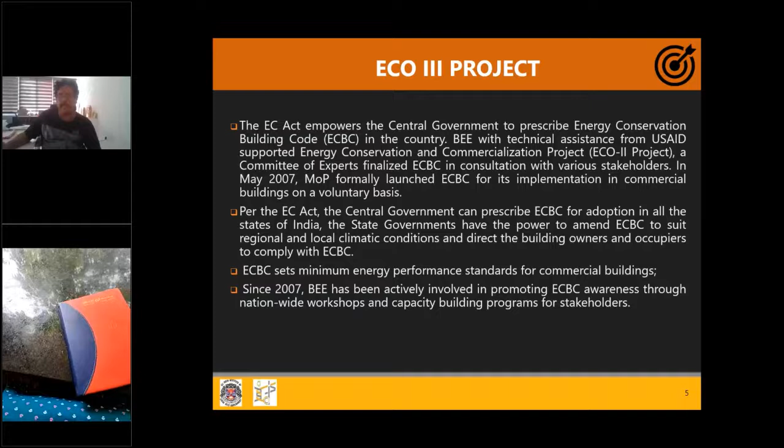Now under capacity building, they had two targets at that point. One was making people trainers - so all of us who are ECBC master trainers were part of that objective. There was a figure at that time - I think 52 standards we had at that time - and we needed to create a certain number as part of that objective. The second objective was training a certain number of people through the ECBC master trainers who were trained in the code.

So all these training sessions that are happening are part of that second objective. We go to different state ECBC cells, there's an invitation, and the audience is mostly representation from local bodies, engineers, architects, consultants, architectural firms, MEP consultancy - all these people. So the second KPI of the second objective was to conduct a certain number of such sessions. Yes, is there a question?

Hello. Sir, your voice was cutting in the middle. Is it okay now? Yes, sir, now it is fine. Hello, sir. Okay, yes, sure, wait, let me see. Where's the speaker of this thing? Anyways, so...

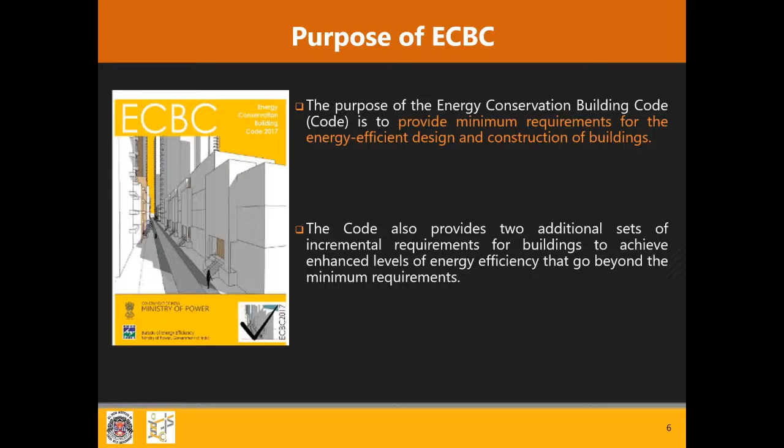Now, when ECBC started, as I said, it was targeted for the commercial sector, so any commercial building. The minimum threshold for the code to be applicable was a connected load of 100 kilowatt or greater, or a contract demand of 120 kVA, and it was intended to be used for commercial purposes only. So private residential buildings, even if their contract demand or connected load exceeded 100 kilowatt, were not part of the ECBC scope at that time.

So in the first part of India's ECBC journey, residential was not part of it. Then slowly, residential became a huge energy demand space in the whole India energy market, and hence they started the Eco Niwas Samhita process, and then it went on.

Now, as I said, through ECBC you can be either an ECBC building, ECBC Plus building, or Super ECBC building. So these are the three levels of energy efficiency that you can achieve.

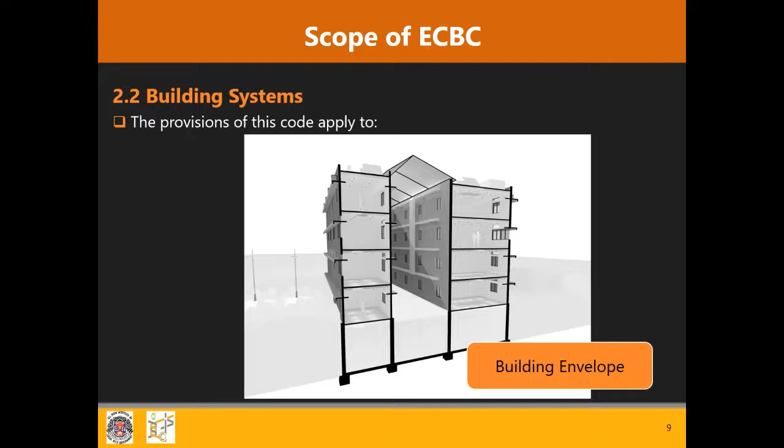The first aspect is the building envelope - that is the exterior wall, the roof, the glass. The internal floor and ceiling are not that impactful, but still have a marginal impact on the entire energy performance of the building. Skylights also form part of the building envelope. Even underground, if there is a basement, the external wall of that basement, the slab on floor - all those things form part of the building envelope.

Second is the comfort system - all HVAC related stuff, any system meant to create comfort within the building. Your HVAC or heating, if the building is located in a very cold region and you need heating, so all those systems and how you control them to give you that comfort - that is another aspect in the scope of ECBC, that ECBC controls to make your building compliant.

Then the third is lighting and its control. Lighting is a big part of energy consumption of any building. In commercial spaces it's even more important because lighting has to be on 24 hours a day, either for security reasons or other needs. Although ECBC exempts lighting that is there for emergency or security reasons.

For example, if there is any establishment, say a defense establishment, ECBC cannot say 'keep this much LPD to save energy.' At that time, national security is a priority, and anything there for emergency or security reasons cannot be compromised. Similarly, in industrial buildings, any applicable code generally does not include the process energy and the HVAC or lighting that is required. If there is a factory where a high lux level is required, you cannot compromise on that, because if you compromise, people may get injured.

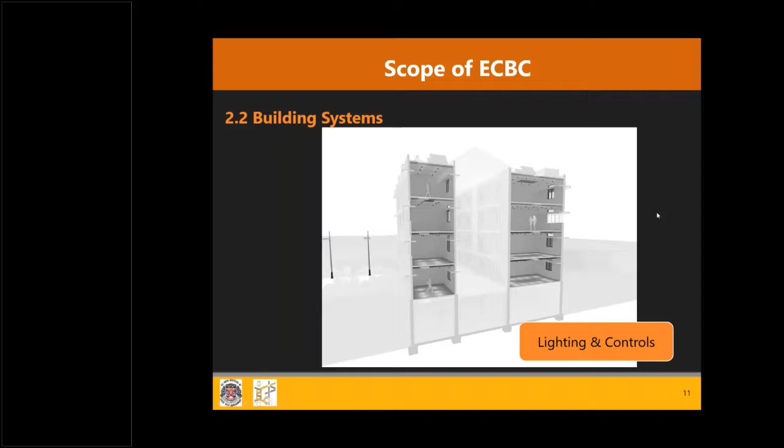So generally, anything that is emergency related or part of the process is not controlled by ECBC. But the general lighting, the decorative lighting - a lot of commercial spaces have decorative lighting - all those things need to be controlled. So that also falls within the ECBC scope.

Then the fourth is the electrical and renewable energy system. The electrical system refers to the transformer and the wiring, the losses, the feeder losses, and all those things. It also includes renewable energy - how much renewable energy, how you design your electrical systems in the building - that also falls within the scope of ECBC.

Now, as I said, there are certain aspects not touched by ECBC. Plug loads, equipment, and parts of the building that use energy for manufacturing process are not covered - you cannot apply ECBC on those unless otherwise specified in the code. For example, if there is a plug load and you need security systems, say CCTV cameras, you cannot apply ECBC and say the CCTV cameras should be controlled, turned on and off. You cannot do that, right?

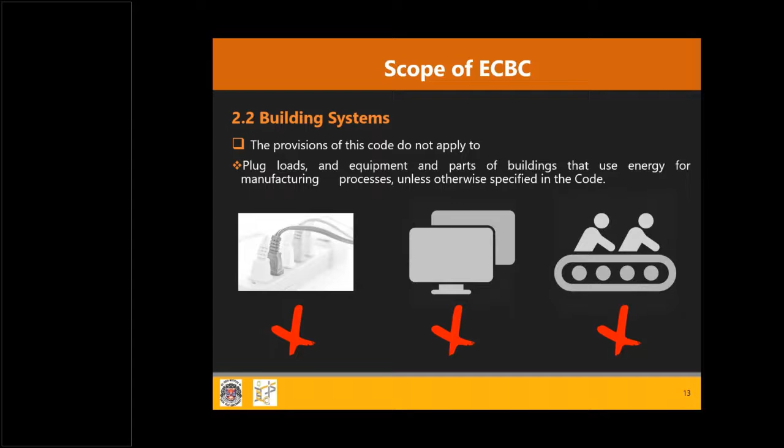So any plug loads, equipment, and any load that is part of a manufacturing process that is not covered by ECBC. Now, in terms of precedence - what happens if there is some conflict between different codes? Say a local municipal regulation and some part of ECBC is coinciding or clashing with the requirements of the local code. So what takes more precedence?

So as you can see here, any policy notified takes precedence over this code.

I think I heard someone unmute their mic - is there any questions? I would take silence as a no.

So again, as you can see, any policy notified as taking precedence over the code, or any other rules on safety, security, health, or environment by central or local government. So where there is a clashing aspect with any such rules, if that clashes with some of the requirements of ECBC, then those rules by the central or local government will take precedence over ECBC.

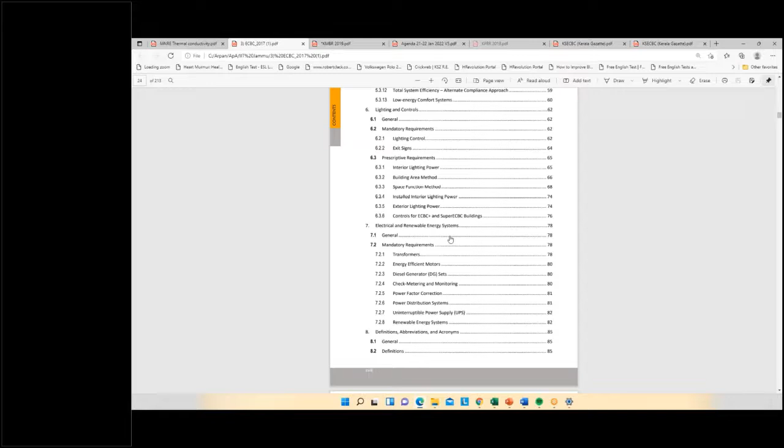Okay, so as you can see here, what it says is that all these sections - 4.2, 5.2, here 6.2, and 7.2 - these are the mandatory requirements. So irrespective of whether you follow, under ECBC there are two ways of complying with the ECBC standard. One is the whole building simulation method, and the second one is the prescriptive method.

Right, so I think I'll skip this, I think it's the next slide. So to comply with the ECBC code, EPI shall be calculated based on one of the following: one is the prescriptive, and the second is the whole building simulation. I believe you are aware of how whole building simulation is done, and what it is, but I'll briefly touch on that.

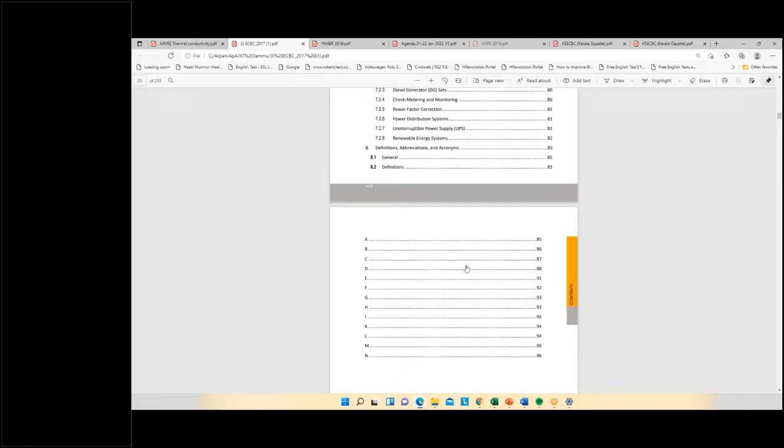In whole building simulation, you have to run an energy simulation as per section 9 of the ECBC code, where you have to build a reference case as well as a proposed case, and then run the simulation as per section 9. I think section 9 is the whole building performance method. As per section 9, it will say what all considerations you need to take for a reference case, and what all considerations you need to take for a proposed case.

Proposed case is what you have, right - what you are building, what glass you are using, what roof section you are having, what wall section you are having - that is your proposed case. What should be your base case? Section 9 of the ECBC report gives you all those things.

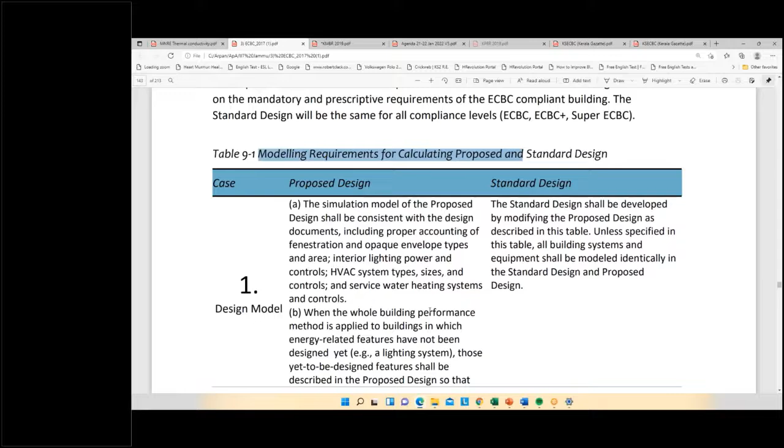So I'll just quickly show you. What's best about this ECBC 2017 is they have hyperlinked the sections. So if you go here, energy simulation requirements, right? If I go here, whole building mandatory requirements - so here, this table, point 9, which is the modeling requirements for calculating the proposed and standard design. This table will give you all the details of what your proposed design should have, and what your standard design should have.

So for example, while you're developing your model in eQuest, IES, or DesignBuilder: here it says the standard design shall be developed by modifying the proposed design as described in this table. So everything in the proposed will be same unless there is a difference here. For example, space use classification—how the different spaces will be classified—should be same in the proposed and the standard year design.

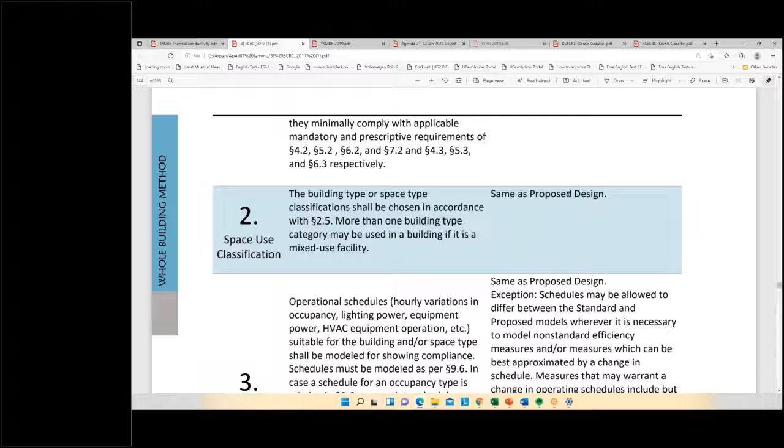This table is another good example. Under building envelope, what should be under your proposed design is there. What your standard design should be, it says: the standard design shall have identical conditioned floors and identical exterior dimensions and orientation as the proposed, except as noted in A, B, C, D, and E.

So what does A say? That standard design performance shall be generated by simulating the building with the actual orientation and then rotating the entire building 90, 180, 270 degrees, and then taking the average.

Let me see if I can use a drawing tool. Okay, so for example, say this is my building. This is north, south, east, west. So if my building is this is the original proposed case orientation.

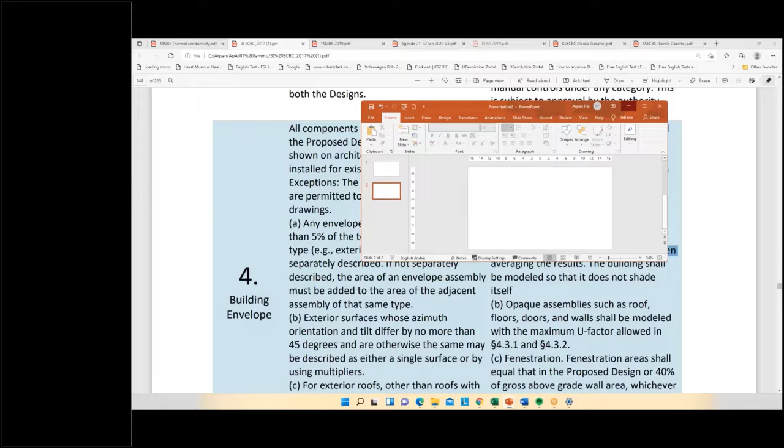So I just wanted to show you that—let me erase all drawing. Yeah, so that is how this ECBC code tells you what to do in the standard design and what to do in the proposed year design.

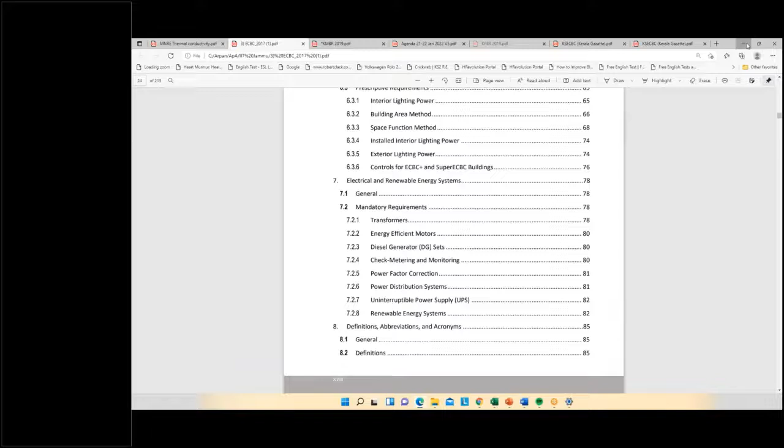So I'll go back to this. So again, 5.2, 4.2, 6.2, and 7.2—these are the mandatory requirements that, whether you do a prescriptive or a whole building simulation, you have to follow. So that's one of the things.

Now, based on how you want to do it, you can go by prescriptive or by simulation. Based on that, you have to calculate an EPI in both cases. In prescriptive, you also need to calculate it; in the whole building performance method, you also need to calculate it. What's the difference, and why would you want to do a whole building simulation versus a prescriptive approach?

Whole building simulation gives you the option for adding diversity factors and utilization profiles. You cannot do that in the prescriptive method. In whole building simulation, you can tell the building that from morning 8 to evening 6, the HVAC will be on at 70% of total peak load. Maybe during lunchtime from 1 to 2, it may drop down to 50%. All those variations you can make in the whole building simulation, which gives you a better picture of what the building will be when it is operational. So all those tweaks you can do in whole building simulation.

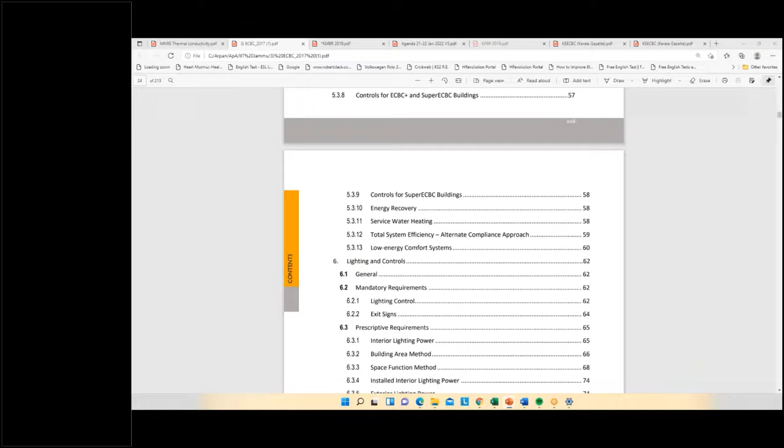Up till now, are there any other questions? I'll come to your question on the EPI calculation in the prescriptive, but let me know if there are any other questions from anyone else.

Yes, there's another question that says, while calculation of EPI, shall we account yield from solar PV and consumption of EV? When you say EV, I believe you are mentioning electric vehicles. Is that what you're saying? Yes, EV charging.

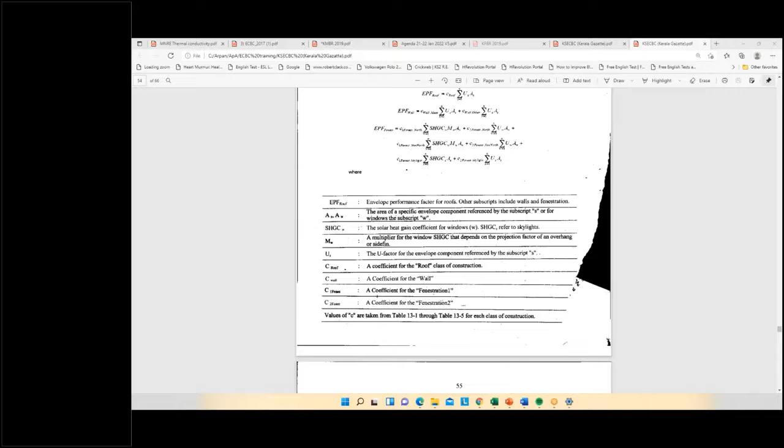Yes, that is what I want to know, whether that is energy conservation. Energy conservation means reduce the demand, then only EPI will come down. Otherwise, if I consume higher and I am installing a solar PV to offset it, shall I take it upon to the EPI? Rather, we will take it to the carbon offset. Carbon offset, we can minus it since it is clean energy.

But from an energy audit point of view, we are facing some issues and requiring some clarifications in this matter. In the code also, it is not clear.

That's why I asked this. At the end of the day, whether you do this through whole building simulation only, you still have to meet the minimum requirements. So there is that basic level of compliance which you have to make. You cannot just make a single 120 brick wall and then have a huge solar PV on the roof.

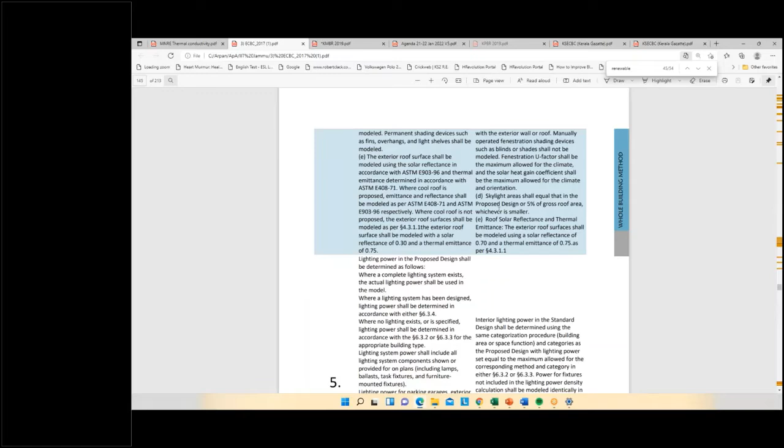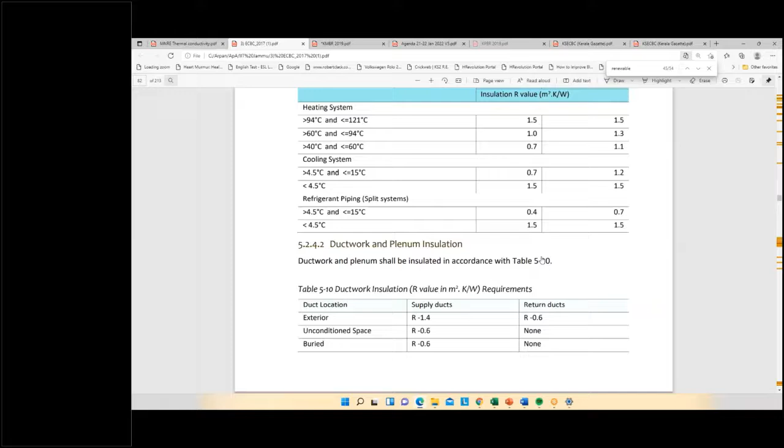Yes, so as you can see in these requirements, the only requirement as per ECBC here is the service hot water. That's it - the service hot water heating system shall be of the same type as the proposed design for residential facilities, hotels, and a standard design shall have solar hot water capable of meeting 20% of the total water demand. So you're right in saying that this does not exactly give a clear indication.

But just asking - in your submissions, has this been an issue?

Yes sir, in this case also the solar hot water, that is also a consumption. So the energy demand for that consumption also has to be added to the EPI. For the solar hot water, solar is also an energy - it is being consumed in the building, so we have to, we can reduce carbon, but we have to add it to the numerator part of the EPI.

And also one more thing - if instead of solar, the consumer is using a hot water boiler with diesel, then the diesel consumption normalized to kilowatt hour can also be added to EPI. In the ECBC code, I think only electrical energy is considered - the thermal is not considered, right?

Yeah, but then you have to account for that only, because as you saw in the baseline you have to consider that 20%. Say in your proposed case, you are having 100% hot water generated by a diesel thermal system - in your standard case, you have to account that my requirement is 100 liters a day or 200 liters a day, and then that has to be coming from 20% of that should be solar.

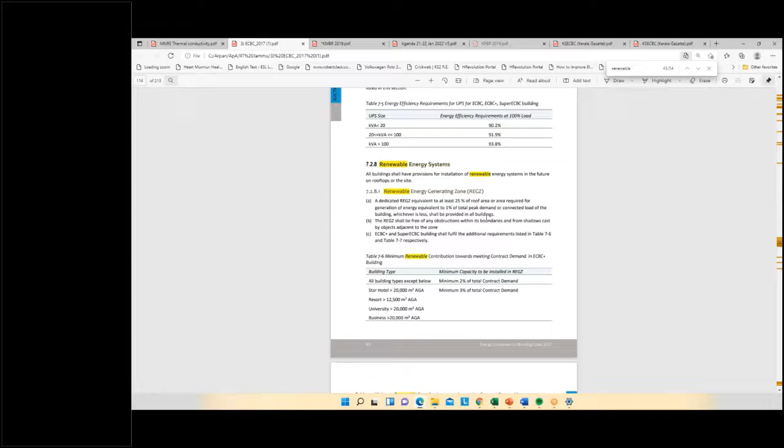As this says, in the hot water section, service hot water, 20% of your building demand has to be met. That is a mandatory regulation under this. So if I go here and say, where is the hot water light control? Yes sir, that is service hot water.

But in the numerator, whether it is electrical energy alone or thermal also will become part of it - that is my question, that kilowatt hour per meter square per year. You have to find a conversion factor, you cannot just add that thermal energy in there. You can normalize to kilowatt hour, but the code I think is saying only electrical is to be taken. There's a lot of confusion in between.

So no, see, at the end of the day, what the code requires you to do is give the actual thing. Now say if you're using thermal, right, you can always convert that thing, saying that okay, if the same water I am needed to heat through electrical, maybe the efficiency will change. Of course, the way thermal works and electricity, it will be totally different efficiencies, and then you might come up with other values, but then you have to consider that as well in the numerator.

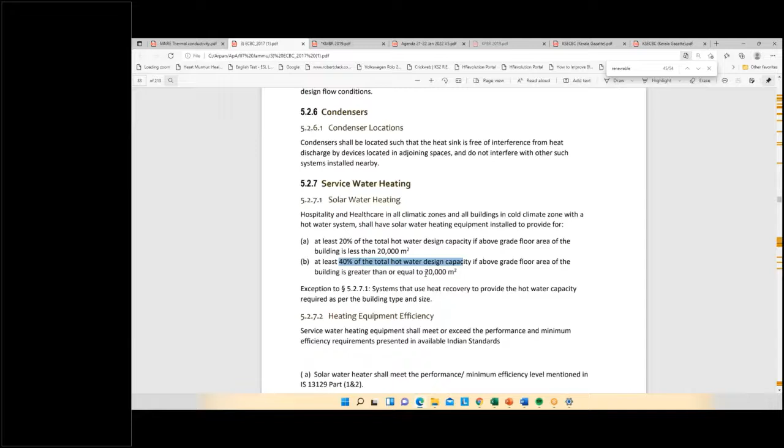So again, if you see here, it says that hospitality and healthcare has to provide 20% hot water of the design capacity, and at least 40% of the design capacity if the above grade floor area is above 20,000 square meters. And then exceptions - systems that use heat recovery to provide hot water capacity, as per the type of building, don't have to meet this requirement. But this is a mandatory requirement.

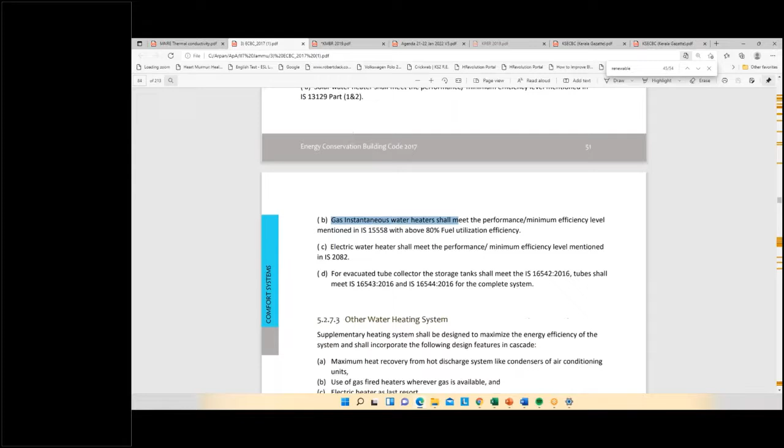But again, if you see here under heating equipment efficiency, you have gas instantaneous - I mean it is electrical as well as gas instantaneous water heaters, with a fuel efficiency of 80%. So if you want to go by the prescriptive way, you just have to meet this requirement.

But if you're going through the whole building simulation way, there is a way you can incorporate in the eQuest software a thermal component as well as an electrical component of the hot water heating system. I think Mr. Viplab will explain that later, you can raise this to him. In eQuest you can say, okay, I have a hot water service thing, and this is the total capacity - this is electric based, this is say heat recovery based, or this is gas fired. All those things - the software can account for that and give you the final calculation that way.

If you can do it. But if you're doing it manually, a lot of people just calculate the energy consumption and then do separate calculations of hot water and add it to the energy consumption in that EPI formula. But you can incorporate whether it is thermal or electrical - in that case, in the eQuest output page, you will get it in terms of thermal and electrical separately if you're using a thermal based system. So did I answer your question?

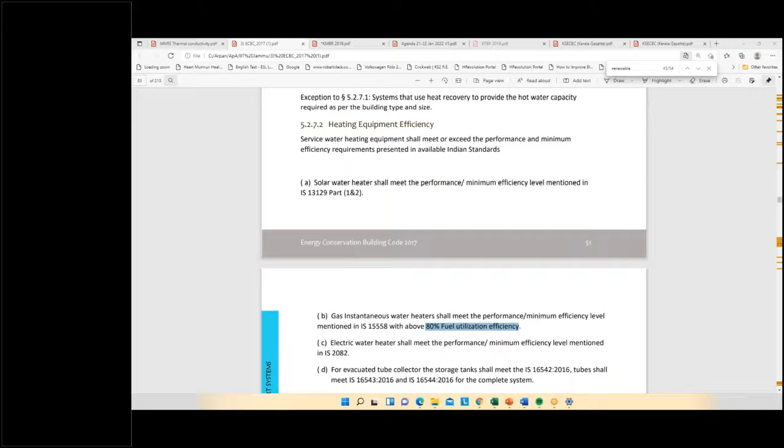The energy demand is still the same. So as Mr. Anish said, you need to improve your efficiency first by reducing the total building demand. So whether it is coming from DG or from the grid, that is the upend thing. You need to manage the demand side thing. So yes, there is a component of your DG in this, but still you will have to manage it.

I think there was a question on how to calculate EPI through prescriptive. What EPI through prescriptive says is that it means the building envelope trade-off method - this is how the EPI is sort of calculated under this. So if you see section 13, this is the Kerala ECBC - section 13 gives you the building envelope trade-off method.

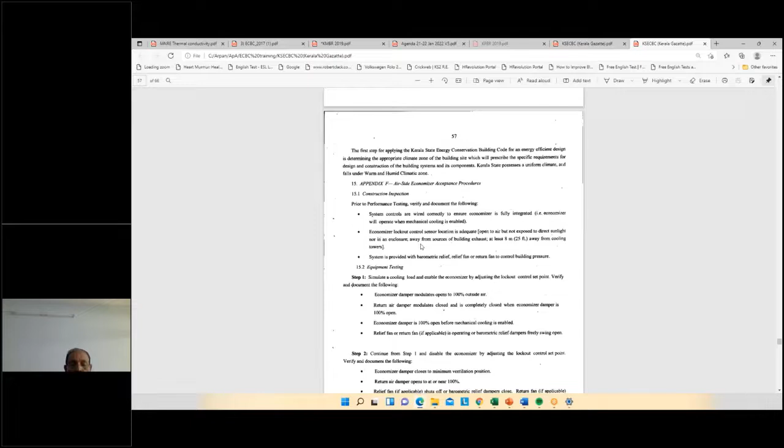So this you will factor in all the EPFs, and then based on your climatic zones - sorry, just a moment, just a moment please. Yeah, sorry, for this - yeah. There was a question, I think, on EPI ratio, how is EPI calculated in the prescriptive case, right?

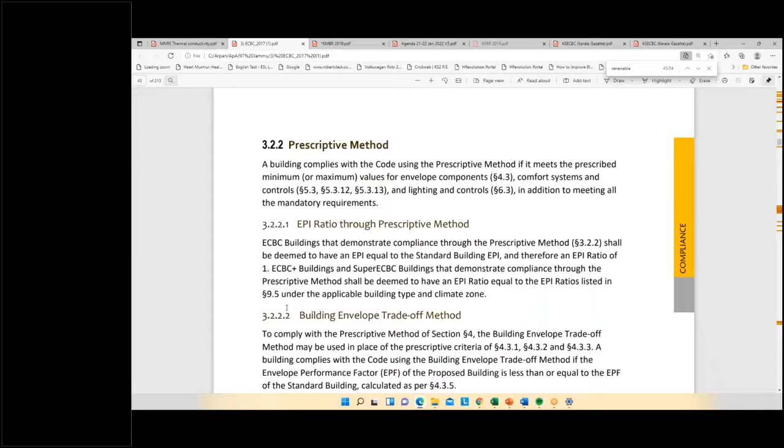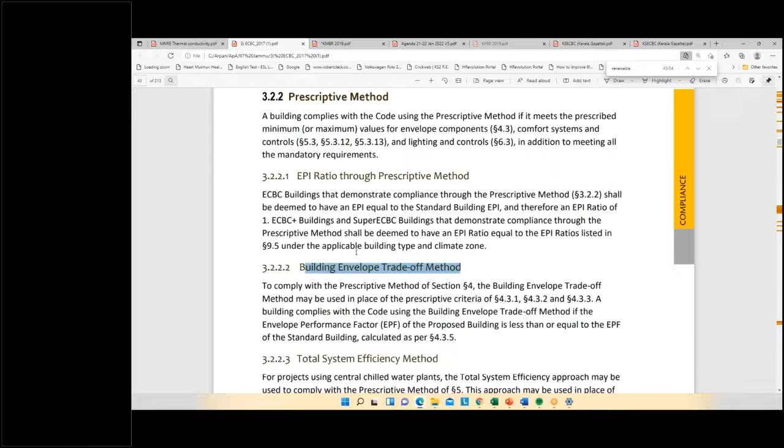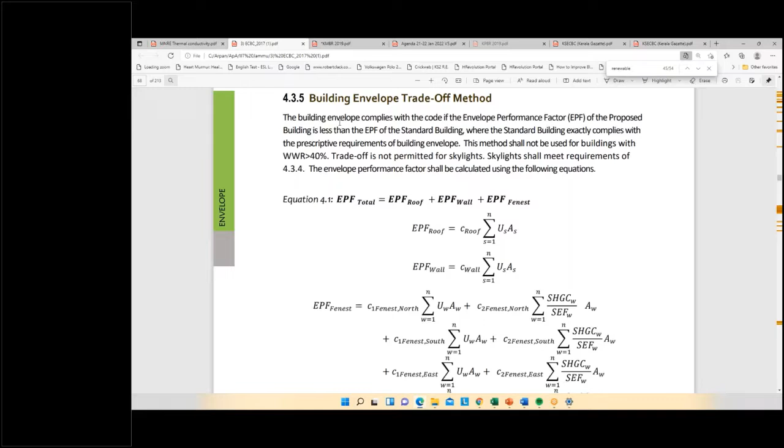I think this is, and the Kerala ECBC also gives the same thing - you have to calculate the building trade-off method, the envelope performance factor here. So if you see this section, I think from page 68, they have given a clear way, and the formulas have been written.

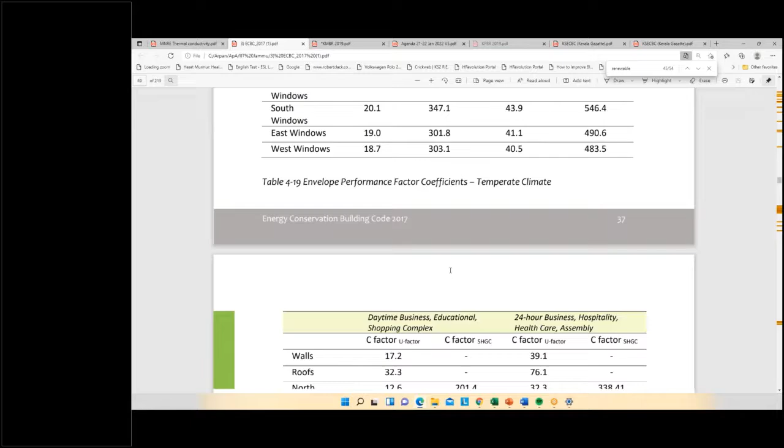They also give the various coefficient factors that you have to consider, and I think there is an application as well - on this application of the building trade-off method, that is shown as an example for a 1,000 square meter single story building. So this entire calculation is shown here.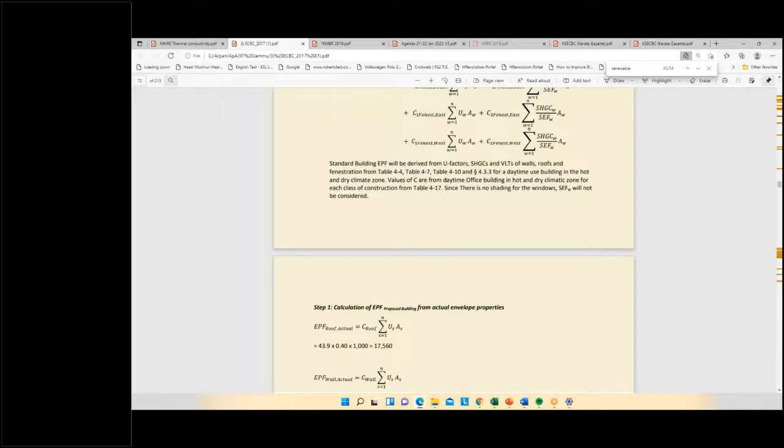So in terms of the prescriptive method, your EPI is deemed to be 1 if you're doing just ECBC. So if I bring this again - sorry, I think this is slideshow - so this table 9.5 gives the EPI ratios for ECBC plus and super ECBC based on the climatic region. So here, as you can see, for composite, if you're going through the prescriptive, your EPI ratio, if you're going for ECBC, is considered to be 1.

If you're going through prescriptive and aiming for ECBC plus compliance, your EPI is deemed as 0.91, and for buildings going for super ECBC through prescriptive, their EPI is deemed as 0.81, given that your baseline is higher than the proposed. Now if you're not going the building trade-off method, I'll just quickly say what the building trade-off method is. There's another question, but section 9 is only WBP method. Yes.

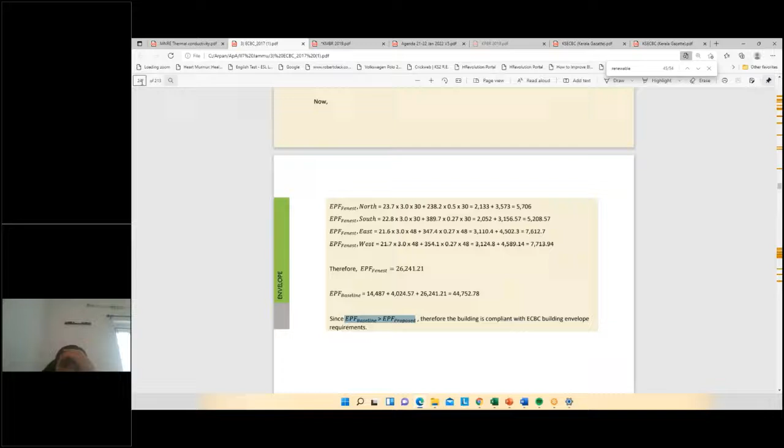Now, in case you are not able to achieve these, if I go to prescriptive requirements, say if you have a roof assembly, your region is warm and humid, you have a roof assembly, and the table is not applicable for... no, it is applicable in a different way. So as we showed you... sorry.

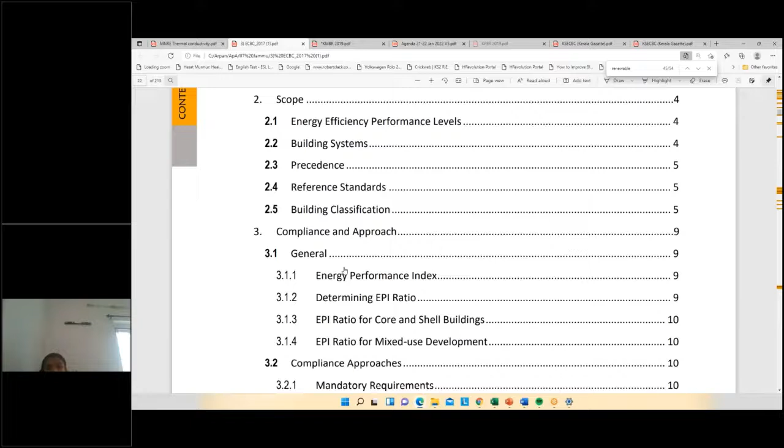So if you go to determining EPI ratio in this prescriptive method, as it says here, ECBC buildings that are going through prescriptive shall be deemed to have equal EPI to standard buildings, and therefore EPI ratios of 1.

So if you're going by prescriptive, in any of the forms or reports that you submit to the local body or the energy management cell, you have to write the EPI. If you meet the prescriptive compliance of ECBC, then you write EPI as 1. If you meet the prescriptive compliance for ECBC plus for your hotel, then you write 0.91.

So you're saying for calculating EPI, we need energy consumption for the building, which we won't be calculating. If yes, I totally agree. But ECBC is only giving you that option: if you're going by prescriptive way and if you are ECBC, then automatically without calculation your EPI is 1. If you're going for ECBC plus through prescriptive way, then automatically your EPI for your building is 0.91.

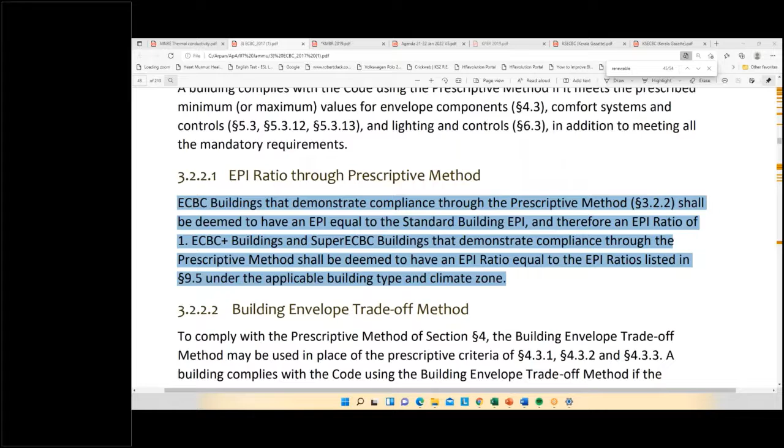So I'll just quickly explain what the building trade-off method is. So now, as you can see here...

If you're going by the prescriptive way, ECBC says that if you are in a warm and humid region and you are a no-star hotel under 10,000 square meters of floor area, then you have to meet 0.63 as your external wall U value. Now, for some reason, say it can be commercial purposes or other reasons outside your control, you cannot meet this. You will have to make a wall that is not meeting 0.63, meaning it is above 0.63.

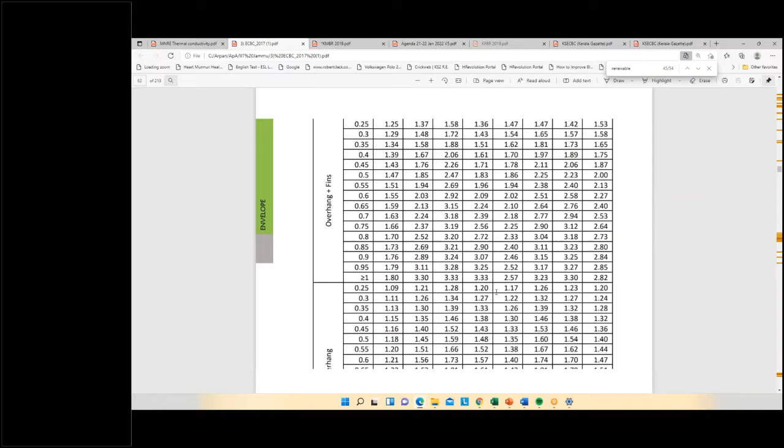Then in that case you can compensate that through increasing performance in some other aspects, meaning roof or glass or shading or something. So that is where your building trade-off comes in.

So in that case, where you're not able to meet all the prescriptive requirements of the building envelope, roof, external wall, glass, or anything - glass is the most common thing that you find, I mean if you go from single glaze to double glaze, the cost goes up like anything, right? So in that case, you can compensate through some shading and all. So in that case, you have to calculate the EPF total. Now in the EPF total, you follow this entire procedure.

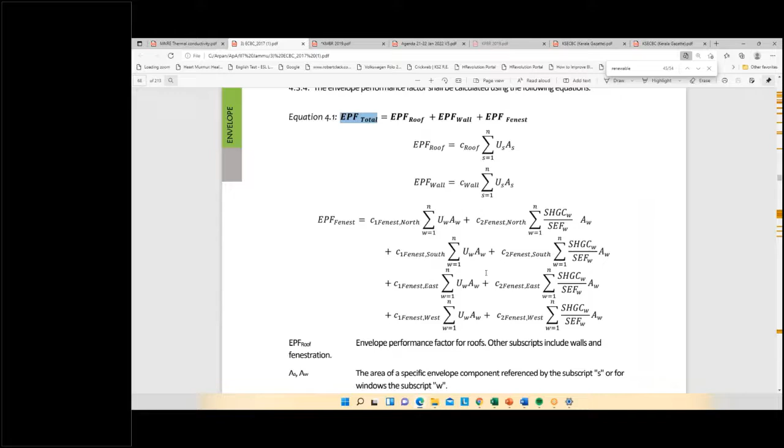A good example is given here. So you follow this entire procedure and come to an EPF figure using your proposed design. In this case, you do an EPF, like an envelope performance factor, for the proposed building, and also an envelope performance factor for the baseline. If you're taking the building trade-off method, your envelope performance factor for the proposed must be below or less than the envelope performance factor of the baseline.

So that means if you fail to comply with any of the individual prescriptive criteria, just as I showed above, you cannot meet 0.63, then you do the calculation, and you have to prove that the EPF of your proposed is less than the EPF of the baseline. If you do this, then you comply for this part. So yeah, that is the entire trade-off method that you have here.

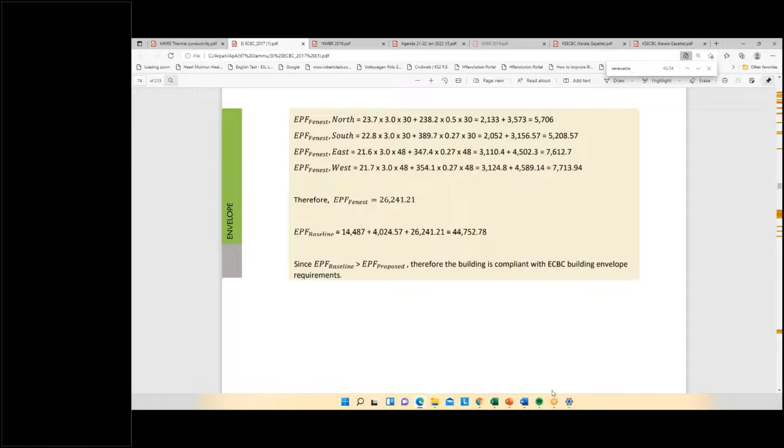And this, in the 2017 document, you can refer to page 71. This gives you an example and shows all the steps involved. It is very easy to follow this and come to the conclusion. This is the way you have to show compliance through the prescriptive way.

Is there any questions up till now? I can imagine this can be a bit overwhelming, but if you go through this example, it is very clear. Each and every component has been calculated separately so that you understand.

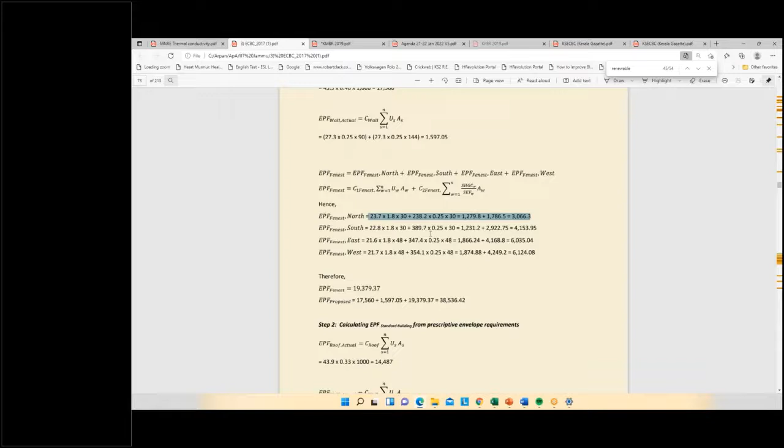What you can do is just go through it and see if there is any doubt on this calculation. If anyone has doubt on this calculation, we can take it up in the after lunch sessions. Okay, now coming to this.

As you can see now, the main difference here is this: ECBC gives the requirement for all composite, hot and dry, warm and humid, temperate, and cold climates as well. Now what the KS ECBC does is it gives you prescriptive requirements just for this state.

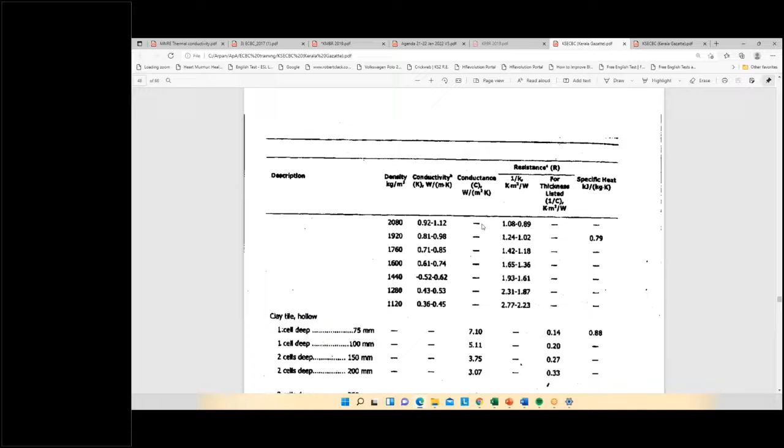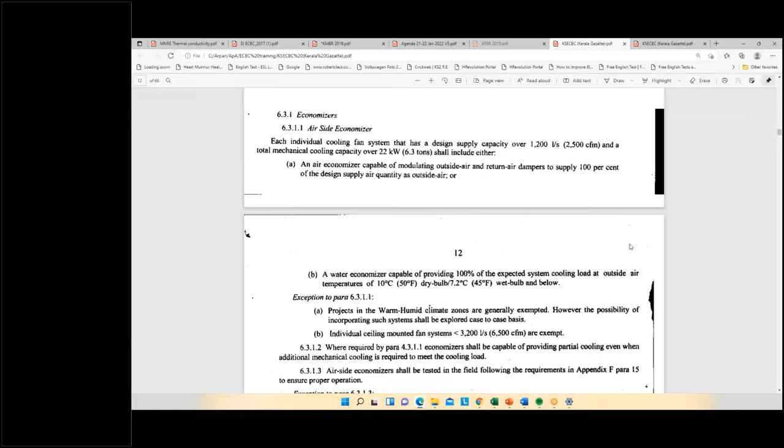So instead of having different climate zones, here if I scroll up to the section, there is only warm and humid here, right? So Kerala state is covered by warm and humid climate only. In this case, to meet the Kerala state requirements, you have to meet just this value. So for any opaque wall, you have to meet 0.44 as a maximum U value factor for all 24-hour use buildings, and for daylight use and daytime use buildings also, it's 0.44.

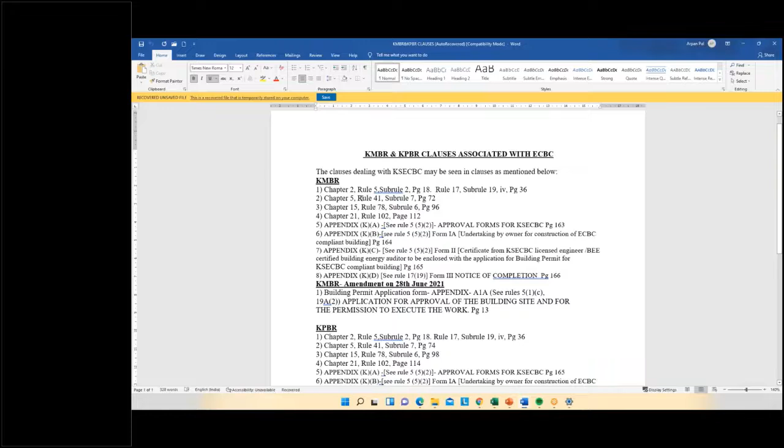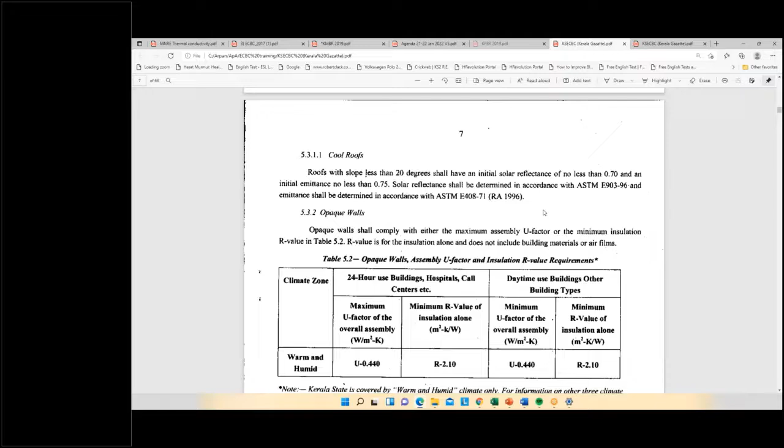Now, if you are unable to meet this, the same building trade-off method is given here in section 13. I think this document has been circulated with all of you, showing which page of the Kerala municipality building rules applies. But apart from that, this KSECBC gazetted notification is only on the energy conservation building code for the state. If you go to section 13, that gives you the building trade-off calculation, which is the same. How to calculate that process you can get from the ECBC, because a live example has been shown there.

So again, as you can see now, the requirements are pretty much similar. It's just that, as you can see here, just like the ECBC, the Kerala State Energy Conservation Building Code also says that the code is applicable to new buildings that have a connected load of 100 kilowatt or greater, or a contract demand of 120 kVA or greater.

Okay, so yeah, there is a question, but ECBC is more stringent than KSECBC, so should Kerala buildings comply with ECBC values only? No, I mean for you, this is the gazette notification, so for the compliance, it is not that. But I think you're saying... wait, let me see.

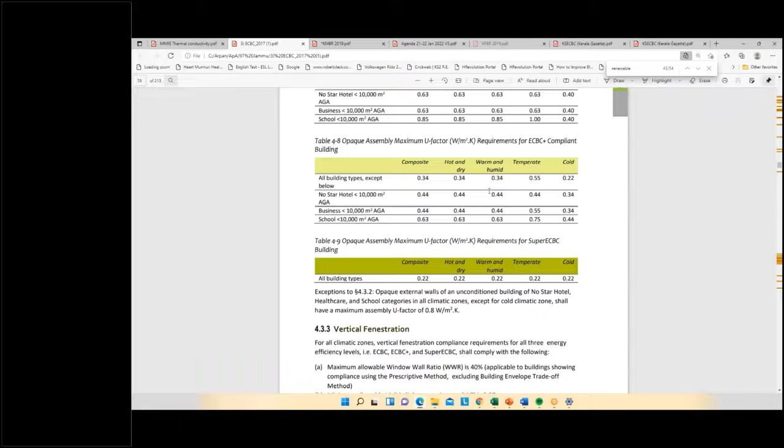That is opaque assembly, so I think the Kerala ECBC says 0.44, right? So yes, you have to follow this one only. For you, it is the Kerala ECBC code only that you have to follow, because the rules are based on that. So for you, the main thing to follow will be the Kerala ECBC code. And here also there is submission and all these things, that we will come to in the second session.

I will tell you the process of the application, where to apply, what to apply, at what stage to apply - all these things come here. So this we'll show in the next session.

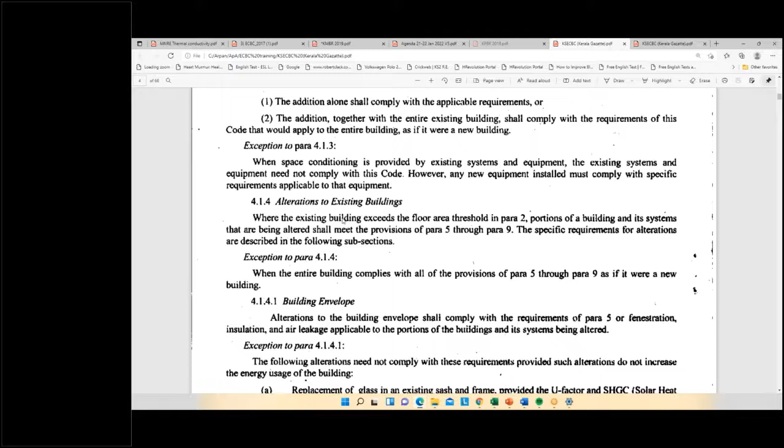Now as you can see, if you scan through this, just like the ECBC, there are mandatory requirements as well as prescriptive requirements. Under 4.1.1, these are all mandatory requirements that you have to meet - service hot water, alterations to building services. These mandatory requirements are a bit different from the ECBC, but for you, these are the main things you have to follow.

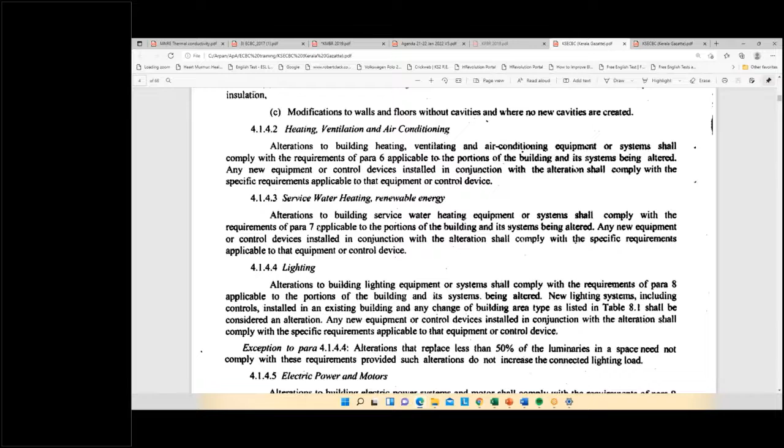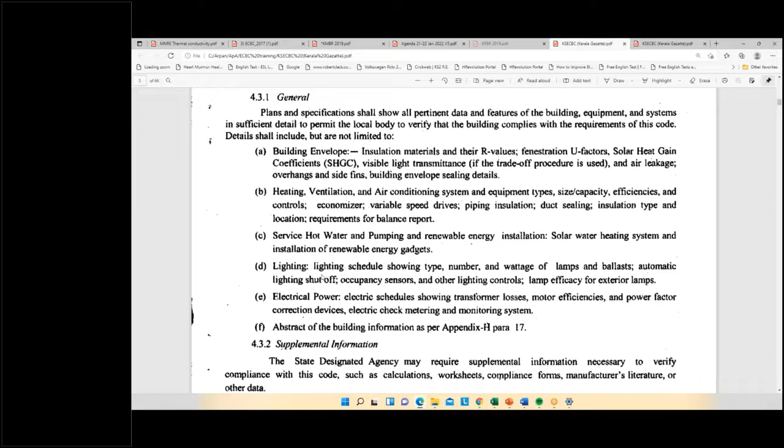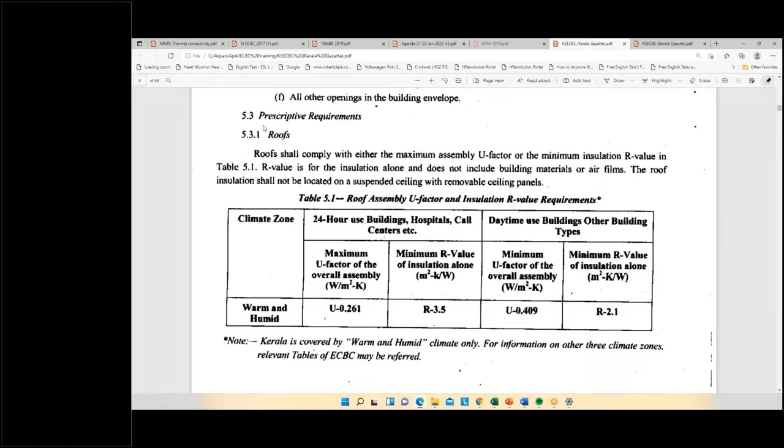Again, the compliance approach gives the prescriptive method and the whole building performance method. There is an envelope trade-off method as well that you have to meet, and similarly there are mandatory requirements. So under every section, if you see envelope, there is a set of mandatory requirements, as there was in the ECBC as well - for the U factor, for the SHGC, and then exceptions too. Similarly, there's the prescriptive way. If you go by the whole building simulation, you're not bound to meet the prescriptive requirements, but the mandatory requirements of these sections you have to meet anyway. This is for warm and humid climate.

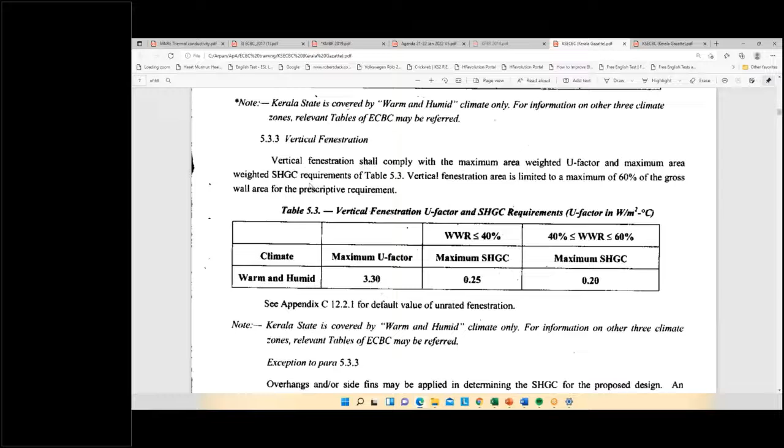So these are again the prescriptive requirements. There are prescriptive requirements for the vertical fenestration, for the wall, for the roof as well, and then exemptions as well. This table - I believe all of you have attended the sessions on the technical aspect, on the calculation of SHGC and all, so I believe you are aware of it.

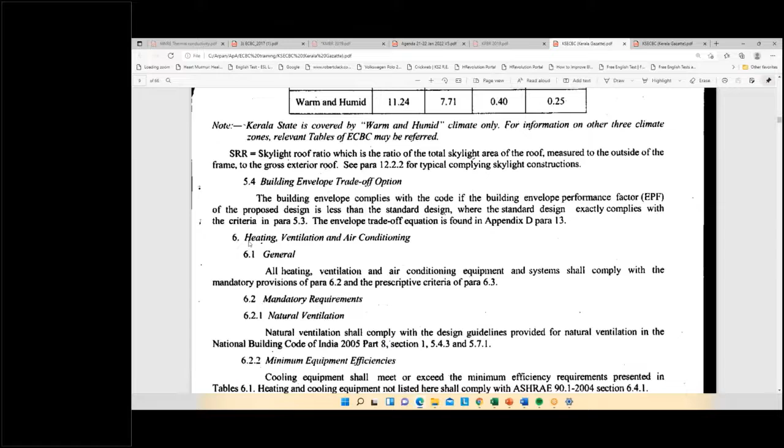Again, similarly, just like envelope, there is a heating section as well. So there is the heating and air conditioning section, under which you have the mandatory requirements - these are the various COPs and the IPLVs that are there. For you, it is of a similar structure to what ECBC is, but at the base, the compliance methods are still the same.

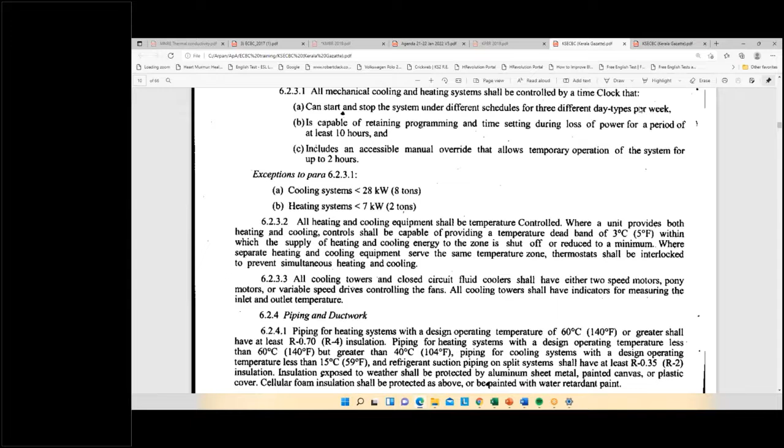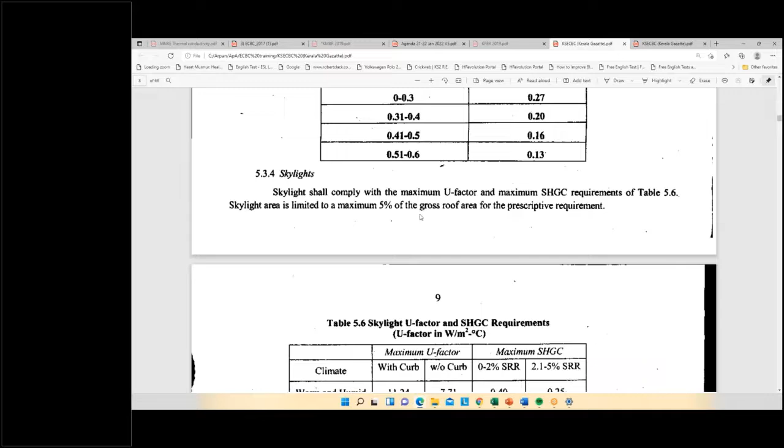You either have prescriptive or whole building simulation. If you're going prescriptive, you have to follow the table here for the minimum VLT, or for the SHGC, or for the U value of the roof, glass, and wall. But if you're going for whole building simulation, similar to the ECBC, there is also a table that shows the requirements for a standard design and a proposed design, and you have to go in the same pathway, the same compliance measure.

The application process we will take up in the second half of today's training session, where we'll also see a sample report. I have prepared a sample report to show you what components you need to include in your ECBC report for the approval process. We'll also show you all the documentation that you have to submit, and to which body, so that the application and approval process are clear to you.

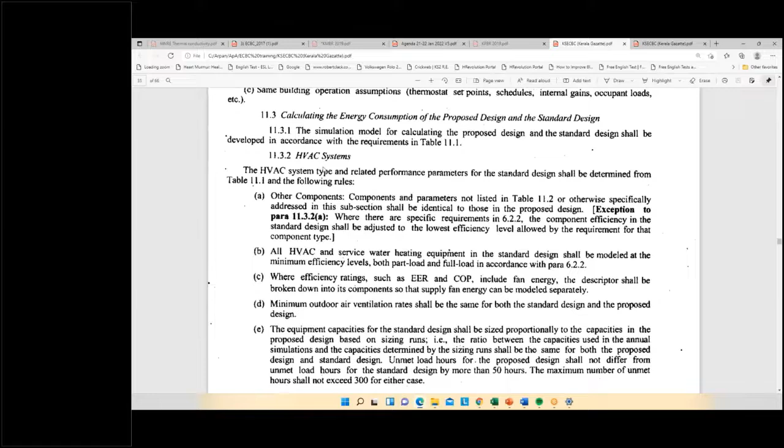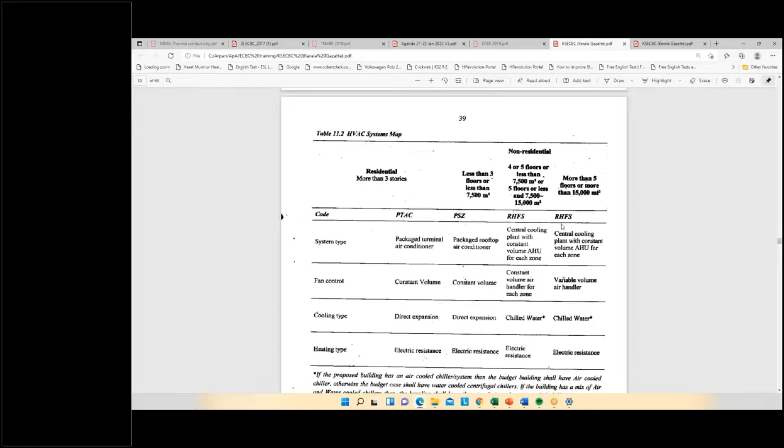I will just show you this one. This is again as in the ECBC, section 11 shows if you're going by the whole building simulation route, just like ECBC, this also gives what should be considered in the proposed building and what should be considered in the standard design. Just like ECBC, again all the system types, and then the chiller efficiency tables as per 6.2.2. This gives you all the things you need to consider in your standard design. And of course proposed is what you have, right? Proposed is your base design.

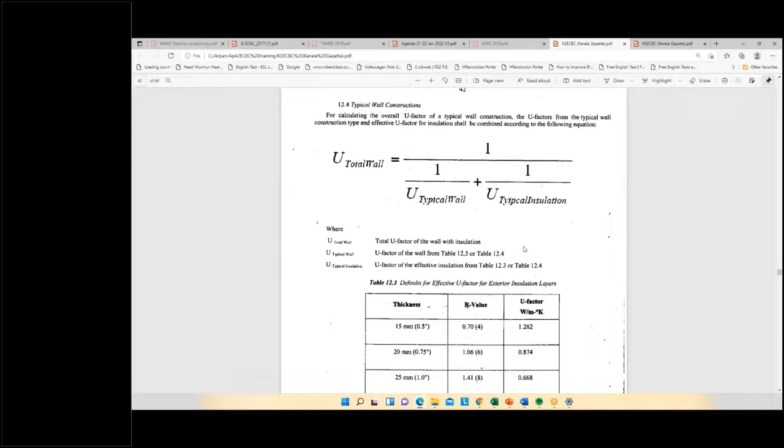So again, if you are doing your manual calculations for your building envelope, your wall constructions, this is how you should do it. This is your typical formula, right?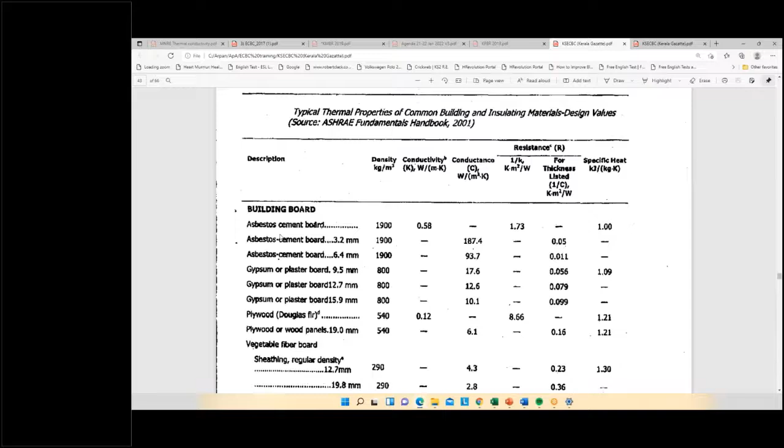And okay, this is another interesting thing you can do. Table 12.4 of this Kerala ECBC guidelines gives you the standard conductivities of the building materials that you should use or can use for your U-value calculation. Generally, at a very concept stage of the design, when things are being worked out, you do not have your materials finalized yet. At that point, you don't know what materials you are using. If you know, you can get the brochures for the exact conductivity or thermal properties. But if you don't know, you can use this table for the conductivity values of different building materials in the calculation of the total U-value of your envelope.

Excuse me, there is some disturbance in the audio. I think somebody's mic is on. If they can switch it off, it would be better, or the admin can do that please.

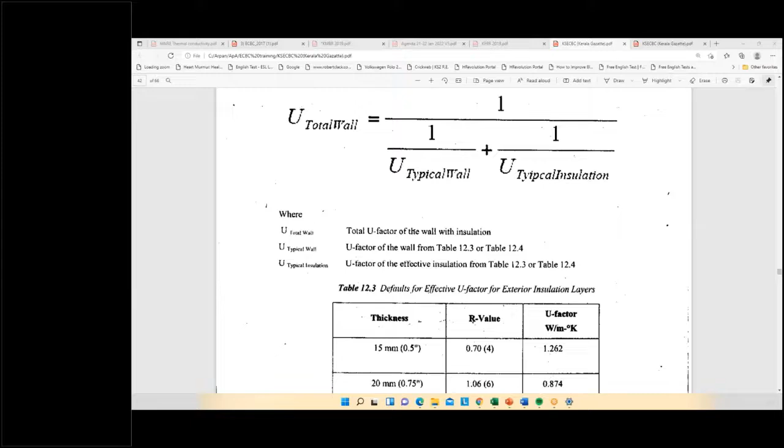Yeah, thank you for raising this. Thank you, I believe so.

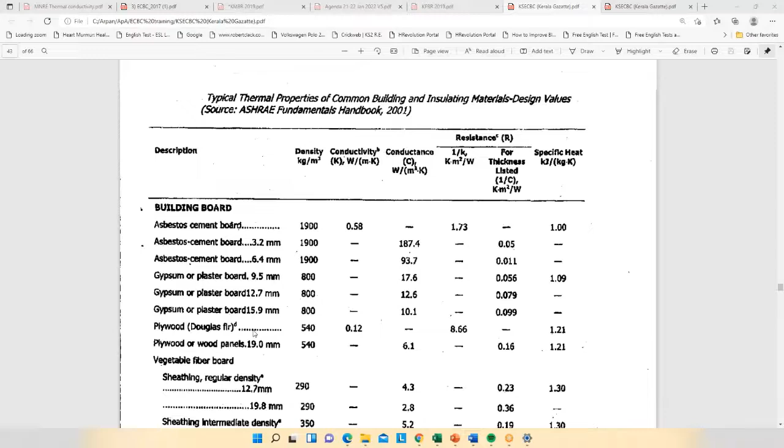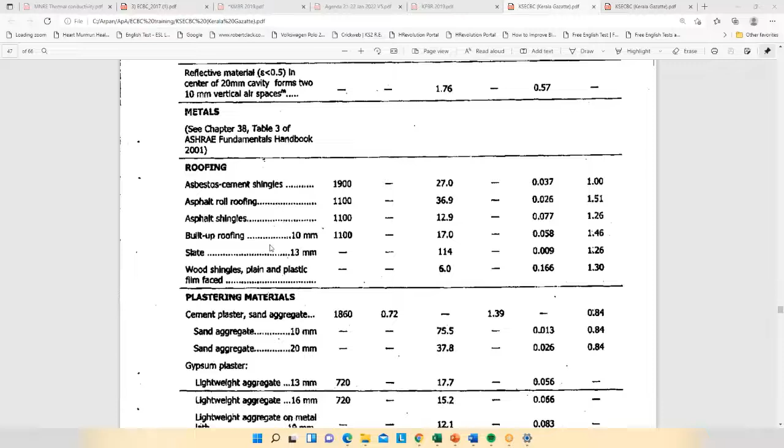Just like I said, this gives the conductance factor for a number of products, starting from glass fibers, bricks and walls, to floor finishing, building membranes, insulating materials, and building boards. So you can refer to this table for taking the conductance values for your U-value calculation. That way you have a good base of the figures you're taking, and it's always good to have reference values for your calculation. This has been incorporated in the KS ECBC. In the earlier ECBC versions it was not there, but now they have incorporated this, and it is a good database from where you can take reference conductance values for building materials.

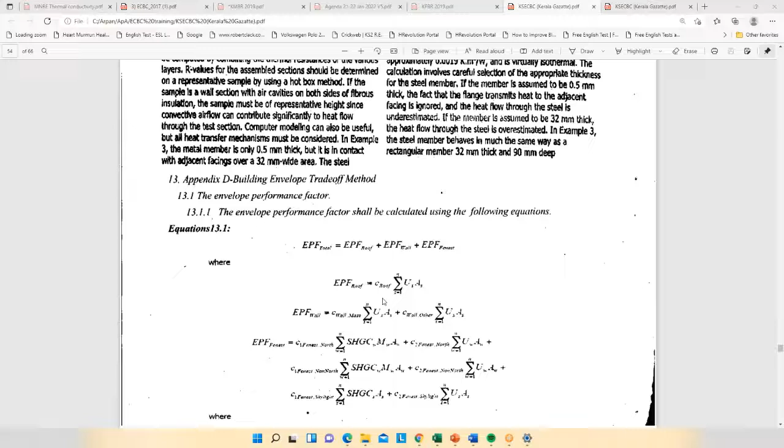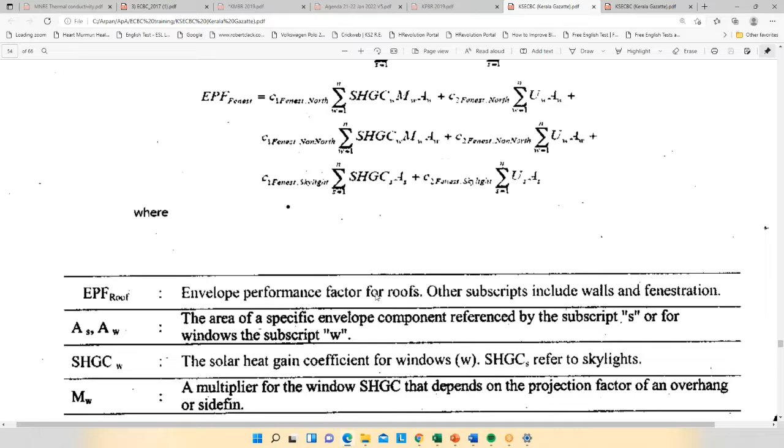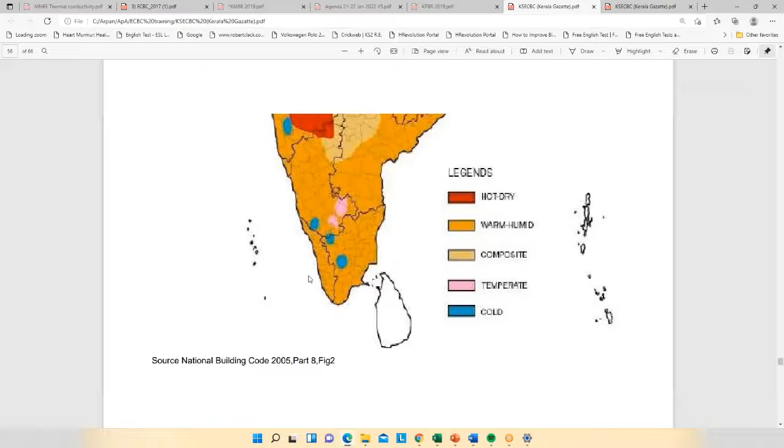Again, as I told you, the building envelope trade-off method is provided here. So if you're not able to meet any prescriptive requirement, you can go to section 13 and use this formula to calculate the EPF of the proposed and the EPF of the baseline, and your EPF of the proposed should always be lower than the EPF of the baseline. As you can see, there is a single figure because the state of Kerala, as per the 5 climatic zones, falls within the warm and humid zone. Hence only the U-value and building envelope requirements for warm and humid have been provided under this code.

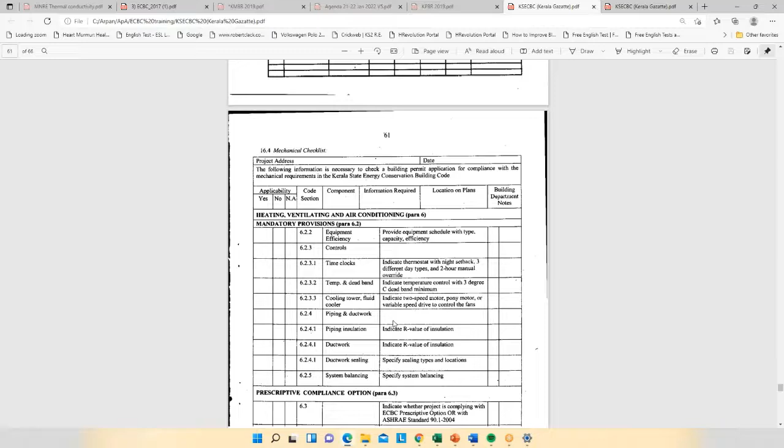And then these are the various appendices which we will come across in the second half. I think if there aren't any other questions, we can end the session here. We are about 10 minutes early, but I think the session started earlier as well. If you have any other question, please feel free to ask. But if you do not have any, I think we can stop this session and reconvene at 2 o'clock.

Rana, can we stop the session if there isn't any further question? Oh okay sir, I think there are none. Okay sir, let us rejoin at 2 o'clock. Okay, thank you so much.